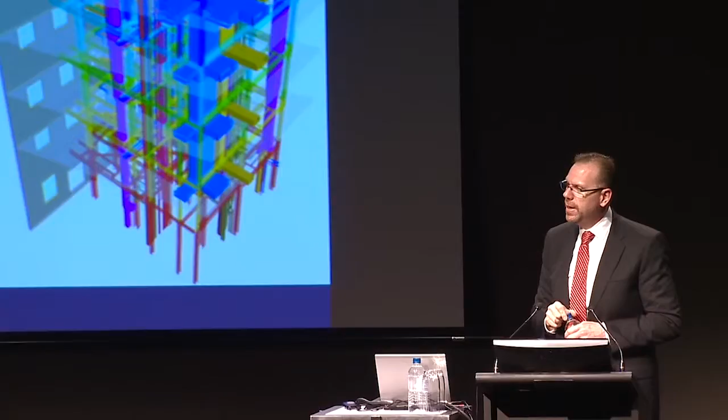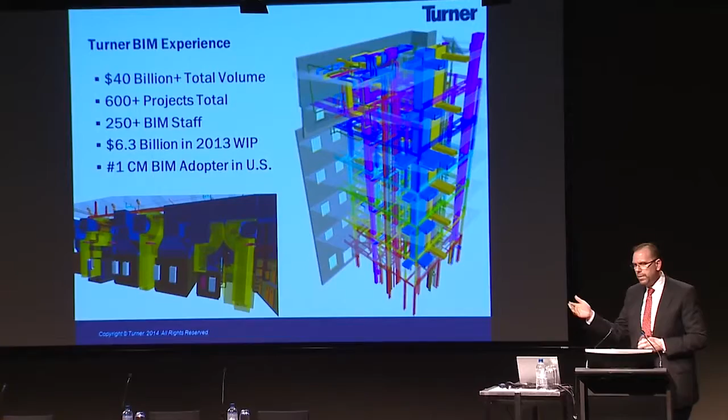Turner has been more by, I'd say, by accident than design, I hate to admit, a leader in the use of BIM. We started 6-7 years ago on the west coast of the U.S. with hospital projects in particular. It was a new technology. We saw the designers starting to model and said, well, how can we take advantage of it? As innovation typically happens, it was very grassroots, just people trying it out on projects. Then it was recognized probably about 5-6 years ago as really game-changing, or potentially having the potential for game-changing impact on the company. So I was, by coincidence, in between some assignments and was very interested in BIM, so I jumped in, started taking on some responsibilities in our New York office and then nationally.

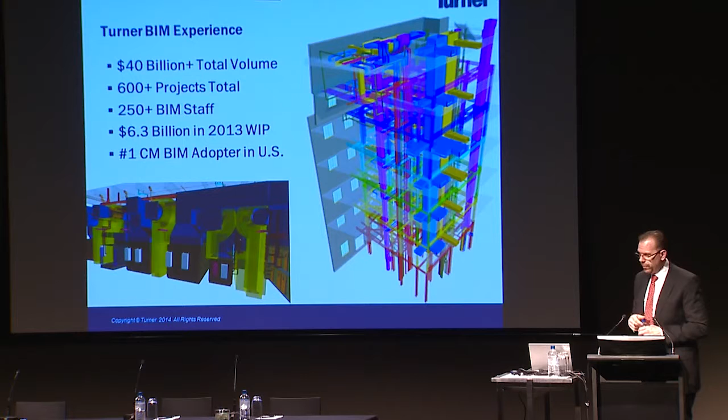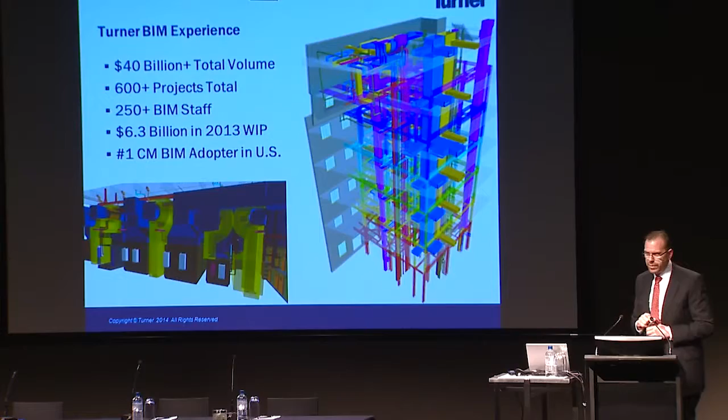In that time, we've had a tremendous amount of growth in the adoption of BIM. What's interesting, and I don't point this out to boast, but to highlight that our growth, up to over 600 projects now, or 40+ billion of work that's either completed or ongoing, was all happening without any sort of mandate. We've never mandated that you must use BIM. It was and continues to be very grassroots. If its value is proven, then people will use it, and that value has been proven time and again.

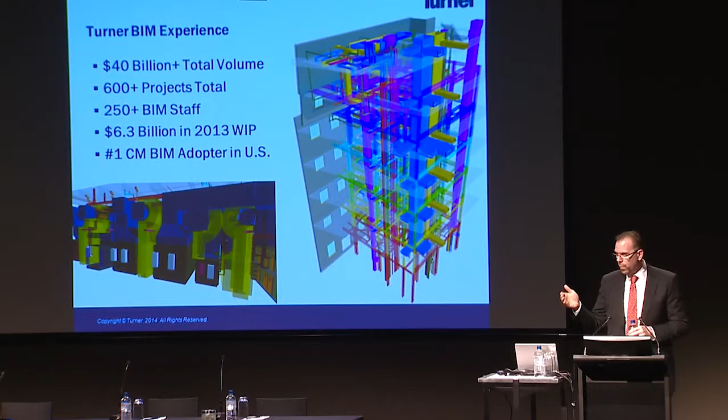But what's interesting is that where we are now, we're getting to that point where we've sort of saturated the basics, and now we're looking forward to how do we advance. So I want to talk quite a bit about that.

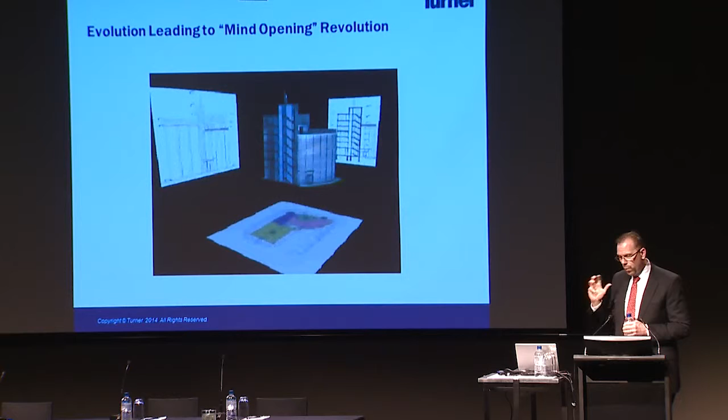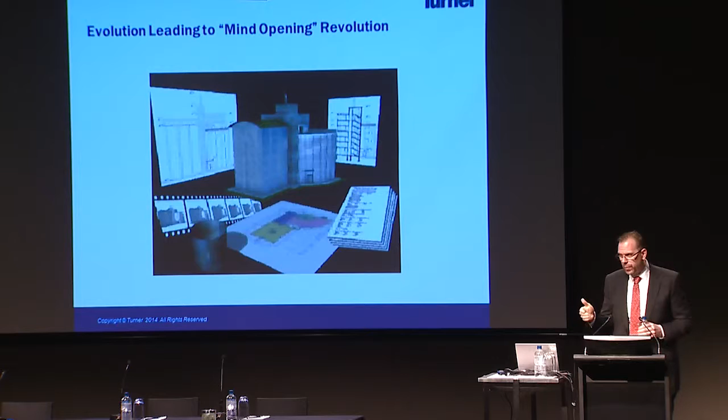That history is all well known to you, but for us it was an interesting thing, because I think BIM, for an industry that is very focused or locked into tradition and the same way of doing things for years and years, really sort of woke people up and said, wow, there are better ways. We can do things with new technologies and get better results. It really was an eye-opener and a door opener for a lot of people in the company.

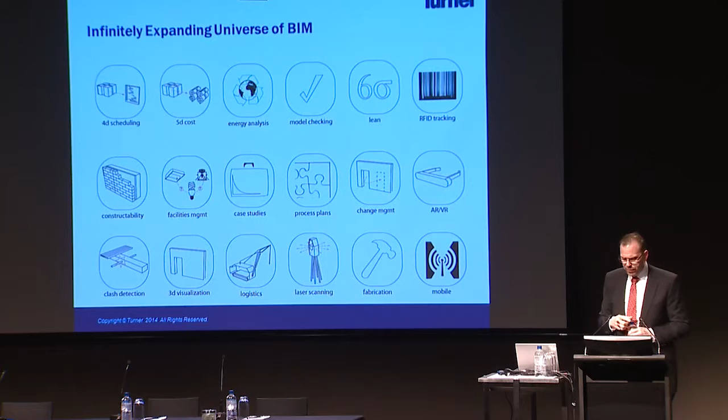And that's led to quite an interest in its broad application, as well as related technologies. It's almost this sort of tsunami of technology that's flooding us now, where everybody's sort of looking around saying, what other tools can we use? So what we see is clearly that there are, as everyone here knows, many uses for BIM.

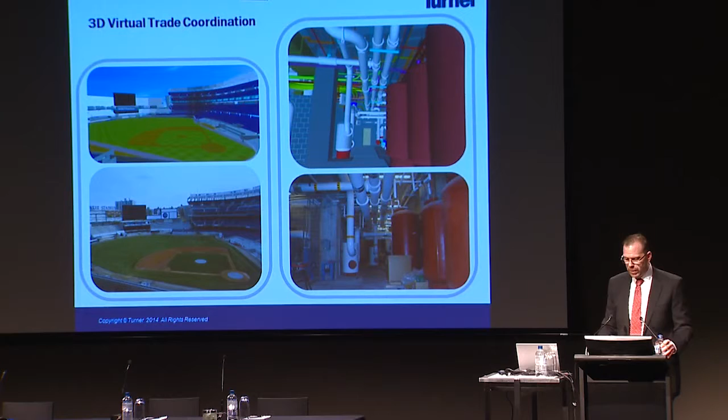I think we've hit most of the basic ones for our company, the trade coordination. This is actually an example - I went back a little bit in time - but this is one of the first big ones for us, probably 4 or 5 years ago, which was Yankee Stadium, the new Yankee Stadium. That was the first large project that we'd ever applied BIM for coordination in particular. It really changed the marketplace in New York City, because we were able to leverage a job of that size and that sort of signature nature of being $1.2 billion, to really change the marketplace. So that was a real start for us as a company, and then we continued to refine that and develop metrics and such around coordination.

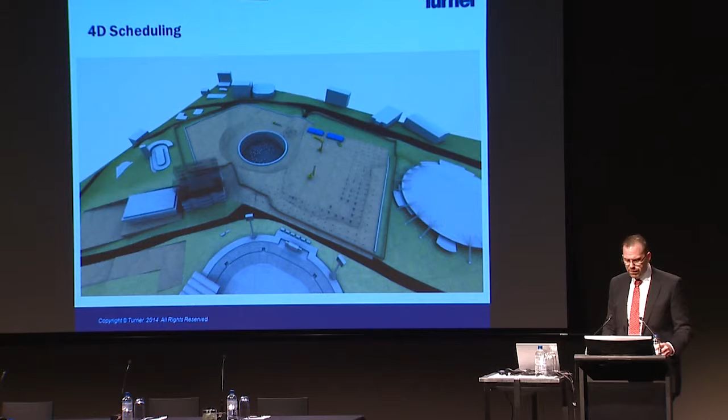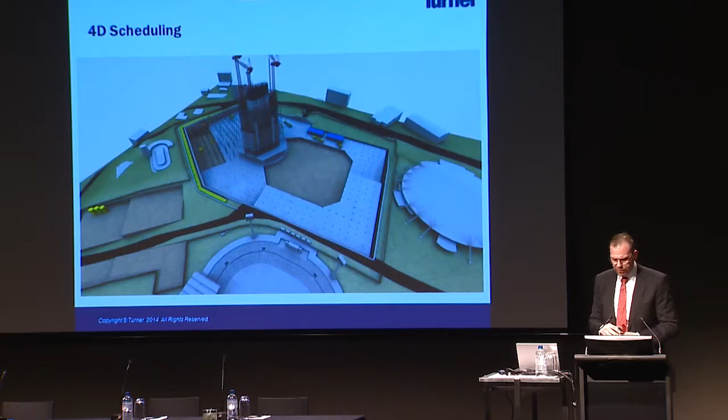Then it migrated naturally into scheduling, and this is an example of a recent one for a job in Kuala Lumpur. It's a 118-story tower where we modeled all the site work, all the logistics of the construction and the sequence as well. It was a fairly extensive effort because we actually got a model out of an architect in Australia, which was in ArchiCAD, so we struggled with that a little bit because that's not as common, but subsequently built this very detailed schedule. So that's fairly bread and butter - at least that's basic sequencing.

Same thing with logistics and safety planning. This example in New York City of one of our projects, the New York University Medical Center, the Langone development - I think it's running now about a $2 billion redevelopment on the east side of Manhattan. Very extensive, very difficult conditions, so everything's modeled to a high level of detail for logistics. And actually, we also worked with the City of New York on developing BIM-based submission plans for their site safety review.

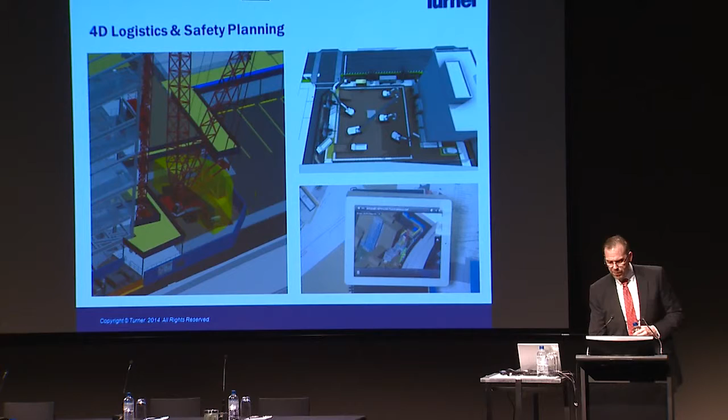Prior to this, they'd mostly been working in 2D, and in fact, one of the gentlemen who's going to talk tomorrow, Tyler Goss, was instrumental in that effort, working with the City of New York and the Department of Buildings, and coming up with this BIM-based plan. So it was a pretty intensive effort, but again, that logistics and safety planning is pretty standard.

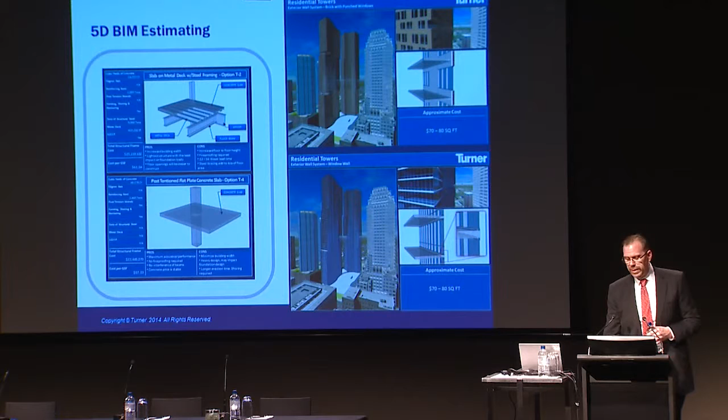Estimating we've started branching out over the years. Now starting to tackle, okay, how do you really integrate BIM into the estimating process? And we've had sort of fits and starts. I have a fairly high standard for BIM for estimating, which is that it's truly integrated as part of the process, that the estimators are using the model, they're extracting the quantities in an organized way. We haven't fully integrated this yet into the estimating process. It's a bit of a struggle.

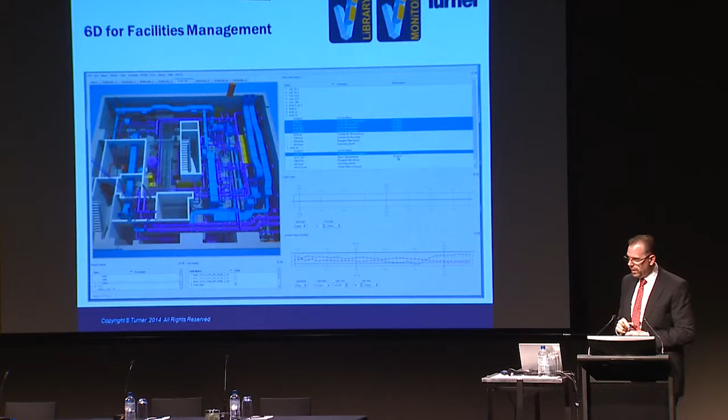And then the other push, so we went upstream, now we're going downstream, is also working on a solution for facilities management. This is an example of a software that we actually worked with a third party in guiding the development. So it's taking the model and it's linking all the documentation to the model, but also we sort of achieved what I call the holy grail of BIM, which is linking into the sensor data.

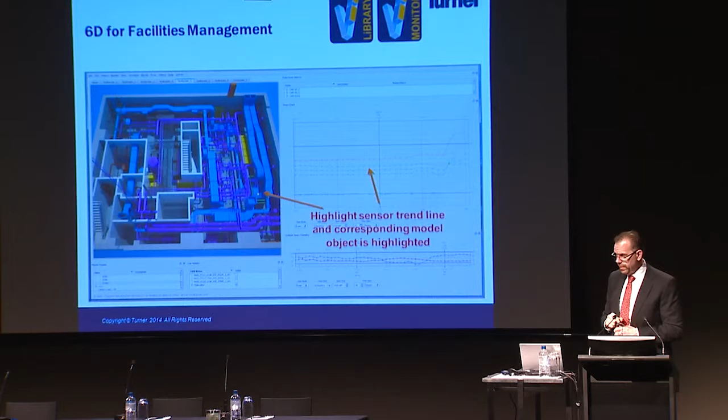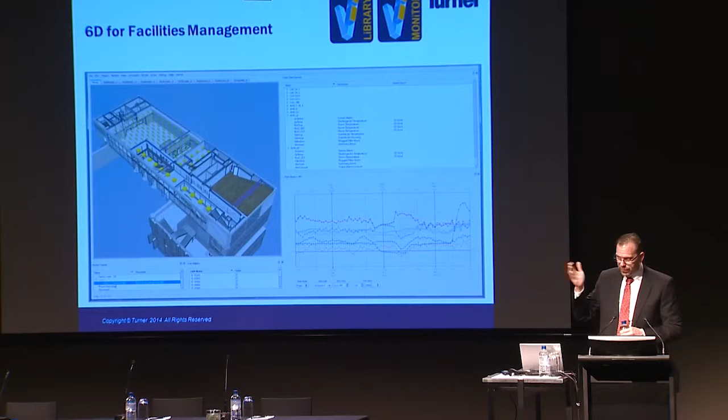So we got a server and connected into the actual control system through a BACnet protocol, and we're streaming all the sensor data out and linked into the model. So you can click on an object and see whatever the temperature, humidity of that piece of equipment or the room or what have you. So it's a pretty amazing, pretty advanced solution.

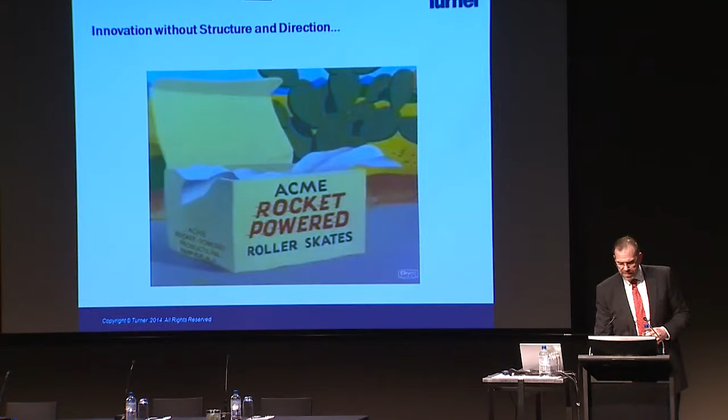But what's interesting is there's a lot of things you can do, but the challenge is guiding it, providing direction. Otherwise, you risk this effect of being out of control. You're innovating for innovation's sake, or you're changing for change's sake, but to what end? And it actually can be quite dangerous if you start running around saying, "Oh, look at all the things I can do with BIM." It can cause trouble.

So, what I wanted to talk about today was this sort of framework, and it's purely my perspective on this, based on having lived through this growth of BIM, and also I'm responsible for lean implementation and IPD, project alliancing type agreements. And what's become clear is there's multiple elements to successfully capitalizing and leveraging these innovations like BIM, which are really focusing on people, the process, and the purpose why you're doing this.

The key, I think, when you're talking about people, is to realize you have all those uses of BIM, 3D, 4D, 5D, which are nouns, right? They're things, versus using BIM as a verb, for action, to do something to get a result, to try to get to a goal that you're trying to accomplish. It's an action tool, and otherwise you risk this issue of what they call the law of the instrument, that if you got a hammer, everything looks like a nail.

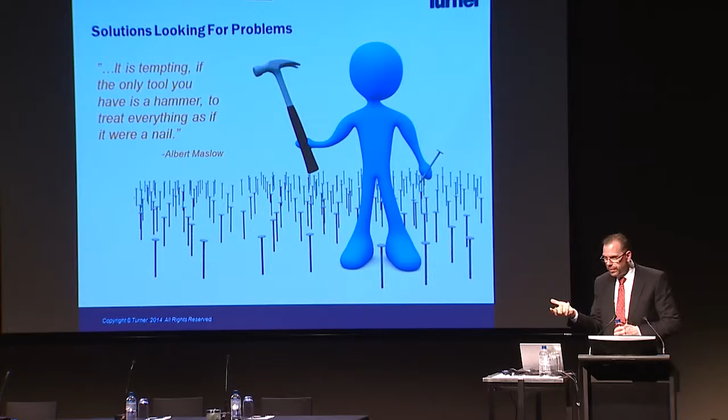I notice that a lot with BIM. We get trapped in this idea. Well, we got this solution, and it's looking for a problem. Let's go try to apply it to something. Versus the other way around. Flip it around. What's the problem? What are we trying to solve? What are the struggles that everybody's dealing with every day? What are the pain points? What are the things we want to improve? How do we help people get their job done better?

And you go back to that example of facilities management. It's a classic. That solution I showed you, we deployed it at, I'm debating whether I should tell you the name, a large educational institution in Manhattan. We actually delivered that solution. They installed it on 10 different machines for the facilities managers, and that was about a year and a half ago. I think since then we maybe had one person look at it.

The facilities guys, we said, oh, well, it's their fault, right? It's them. It's not us. It's a beautiful solution. It's got all the information in the model. It's all linked. It's got all the sensor data. Who wouldn't want that? It's beautiful. But you think about that guy who gets up every day.

The facilities guy gets up in the morning. He goes to work. He's got two things to do. He's either fixing something or he's maintaining something. And so when he goes out and changes that filter, how does that help him do that better? It doesn't. And he's keeping track of maintenance information, probably doing it on an Excel spreadsheet.

I mean, our CIO once told me this, and I've never forgotten it because it's so true. Every solution always competes with Excel. It's true. Anything, because that's the easiest, quickest tool, and that's what people tend to use, and they default to that. So when we're looking at these solutions, when we're thinking, this seems logical, why wouldn't they want this? You've got to flip it around and start thinking from that people perspective.

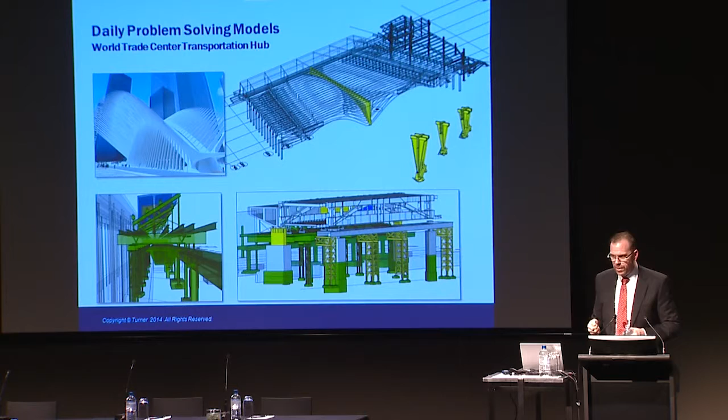We were doing hundreds of little models every day. A superintendent would come over and say, I don't understand. What am I doing over here tomorrow or today? Where's that crane going to go? How do I connect, and how am I coordinating with the work that's adjacent? They had to figure these things out every single day. The fastest, quickest, easiest tool we could use was SketchUp, and it was tremendously helpful and useful.

And we had at least two people full-time down there through last year, and then it started tapering off a little bit.

Here's another example of a very targeted use, fairly recent. We have this large project, the Wilshire Grand Hotel in Los Angeles, and they have a huge mat slab, so they wanted to use this as an opportunity to beat the Guinness Book of World Records for the largest mat slab pour. And so they did something very interesting: they modeled everything they could imagine that was going to go into that job.

They first laser scanned the hole, then they modeled the rebar. There's a cooling system to keep the concrete temperature down, all the little steel starter columns, even the shoring—everything was modeled. Then they placed the concrete, and they deducted for all those things that were modeled, so that they could get an accurate volume of the actual concrete. What's interesting is I'll try to do the math in cubic meters, but the target—

I'll give it in cubic yards. The target, the Guinness Book of World Records previous record, was 21,000 cubic yards of concrete. We modeled everything and came up with a quantity we'd need of 21,240 cubic yards, and the actual concrete poured was 21,200. So we had a difference between what was modeled and estimated, 21,240 versus 21,200—a difference of 0.2% from the actual to the estimate. Unbelievably accurate.

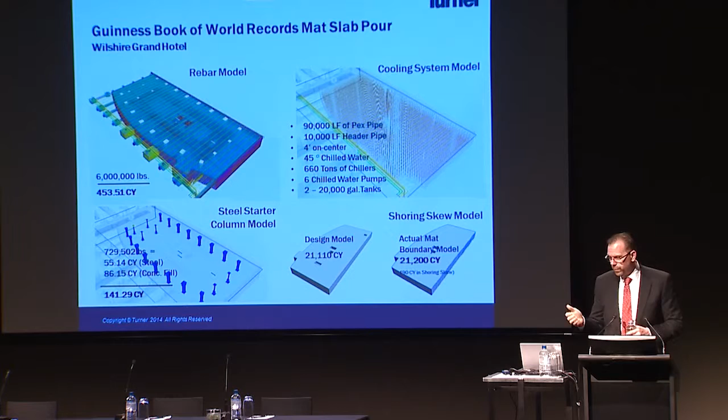And though it was for a purpose you wouldn't expect—this recognition in the Guinness Book of World Records—what you also start to see is, given that accuracy, how do you capitalize on this for a business purpose? It starts to get our people thinking more about trusting in the product.

Here's another example of simple things we're doing to make it easier and solve simple problems. Estimators doing 5D estimating could take quantities off a Revit model all day long, but I don't hold that as our standard. Our standard is integrating it with the estimating process, so average estimators are using the tools and taking advantage of models.

So the simplest on-ramp is something like SketchUp. We built a little in-house plugin for SketchUp where you can use material properties and then use that to organize all your quantities. Very basic—you'd say, oh, it's sort of childish. There are much more sophisticated solutions out there, and we know that. We've used pretty much all of them. We own them all, unfortunately.

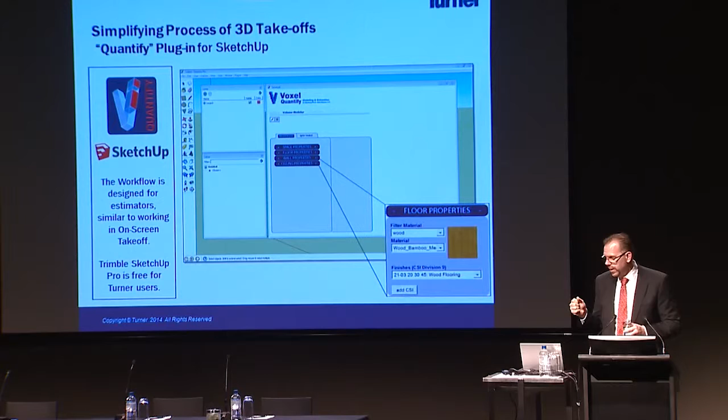But at the end of the day, you've got to think about that 50-year-old senior estimator who's been doing it his whole life the same way, hand takeoffs. If you give him the Ferrari of BIM estimating, he'll never get out of the driveway, so why even try? So we give him something simple: hey, how about SketchUp, and you get some basic quantities for your massing. It's easy, it's approachable, it's not anxiety-inducing—they don't have to figure out all this new software.

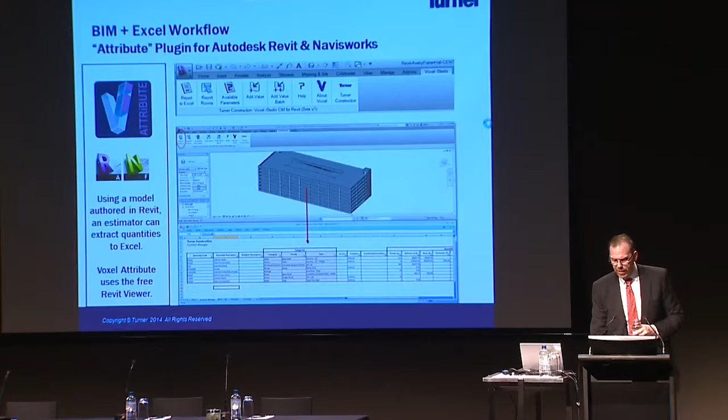It's basic. Same thing when you escalate that a bit—another plugin we developed in-house just gets your quantities out bi-directionally and back into Revit or Navisworks via Excel. Again, why fight the Excel bias? Use it, take advantage of it. Let them work in Excel, but then go back and forth with the quantities and organize them in a way they can use. Oh, there's the Wilshire, out of sequence.

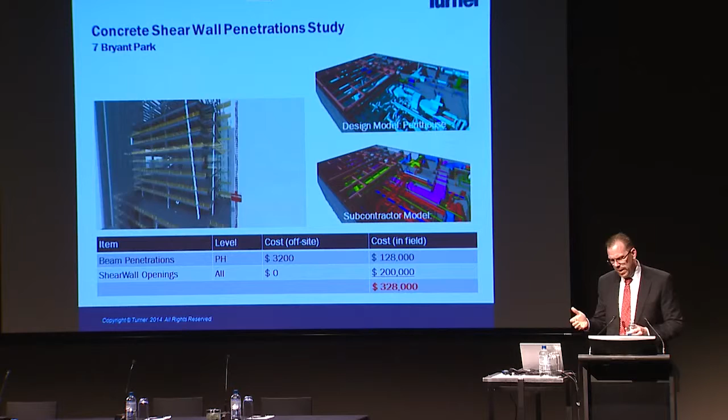Here's another example of using BIM for a very specific purpose: an office tower in New York, 7 Bryant Park. This one was specifically around a thick concrete core going up through the building. They had a lot of penetrations, and when we got the design models, I hate to say it, but they weren't fully coordinated with the shear wall, so we ended up going back in, making sure all the penetrations were coordinated.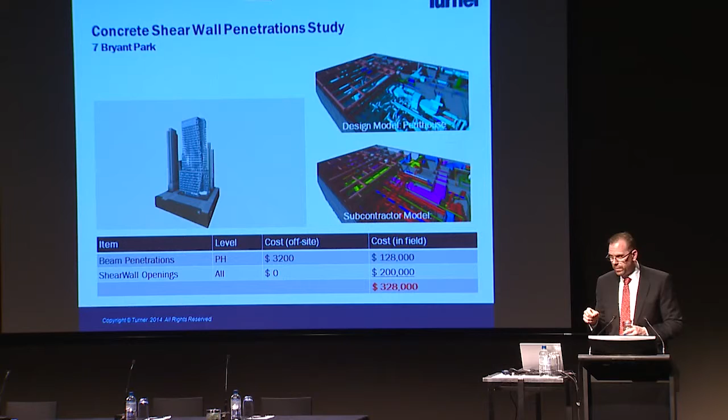We found a lot of issues that we wouldn't have otherwise caught if not for BIM. There's a projected savings, just cost avoidance at the first pass, of $328,000, but that's only for a limited area of the building. We subsequently went through the rest of the building and found more issues, so it's probably $500,000 to $600,000 just in that special study coordinating the shear wall penetrations.

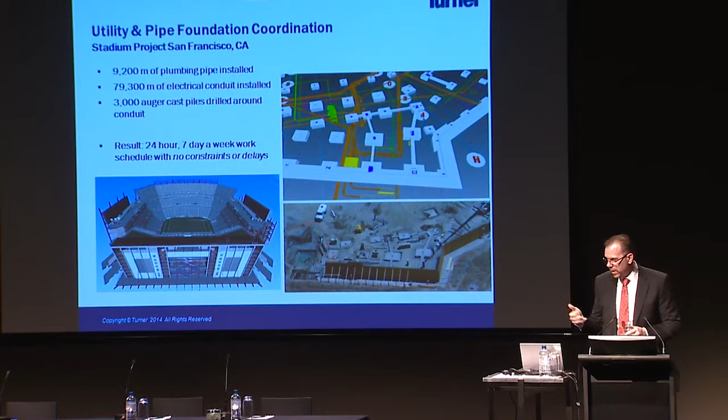Another example is a big stadium project in San Francisco, where we coordinated utilities with foundations: 9,200 meters of plumbing pipe and 79,300 meters of electrical conduit, coordinated with 3,000 piles being drilled. It was a very specialized use of BIM, because that was a problem the project manager and superintendents were grappling with. It's not just the coordination but the sequence as well, since all this utility work was weaving in and out of the piles.

Another example of specialized use is using software called Solibri, where we built an effort on behalf of an architect in California. We took their model and ran it through a code checking exercise using Solibri, converting the building code, what they call OSHPD code, into rules, and then running them through the model so you could see where things are out of compliance.

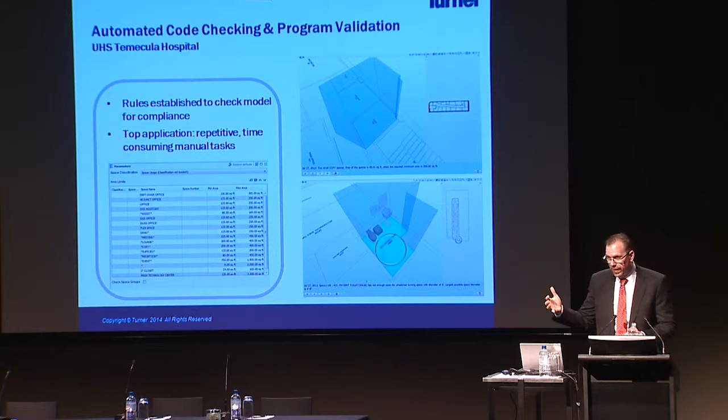So the image at the bottom is the turn radius of a wheelchair in a bathroom. There's a certain radius you have to have. We had a model with all the fixtures in the space, and we run a rule to check if a wheelchair can turn in that space. If it can't, we have to redesign that bathroom. So we flagged all those places in the model that were out of compliance.

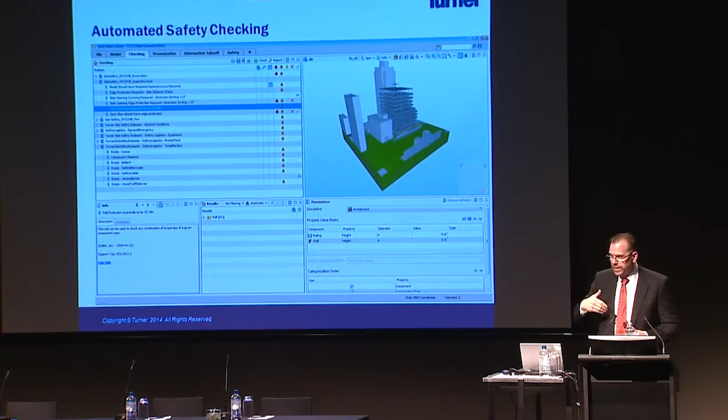It was interesting because we did that on behalf of the architect. Normally this isn't a place we'd play because it's more on the design side, but it was a need. The requirements in California are very stringent. When you submit, if it's not right, it gets rejected and you have to start the process all over again, so we wanted to get it right the first time.

So we extended that effort next to try to take a lot of our safety rules and automate those as well. If you've got a model, the safety managers have all this knowledge in their head about what they're looking at when they're walking a job. In reality, what's in their head can be converted into a rule: if this condition, then this. It's simple conditional statements. So you set up a rule and run it through Solibri again, and it kicks out results.

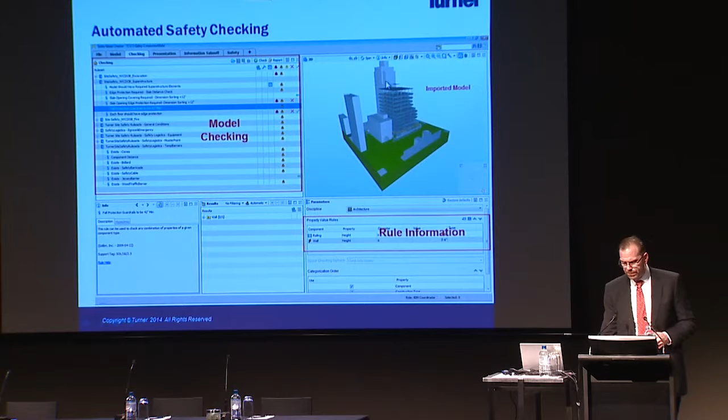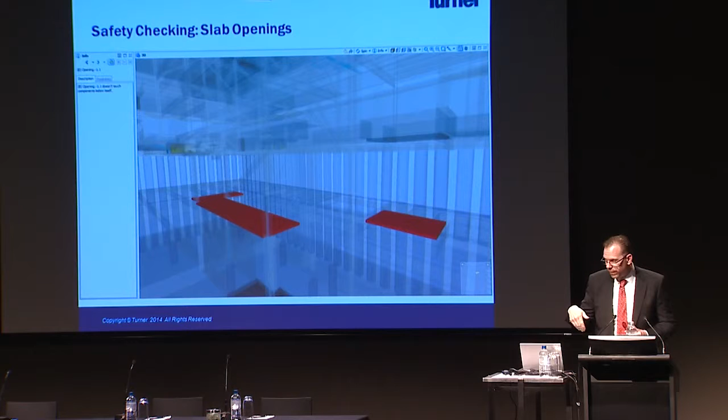For instance, this is an example where it's highlighting the slab opening, so you've got a perimeter protection issue. We're flagging ahead of time to the safety people as well as our staff: look, these areas you're going to have to plan for. You have to buy the protection from the trades or provide it ourselves. And it's just an automated process.

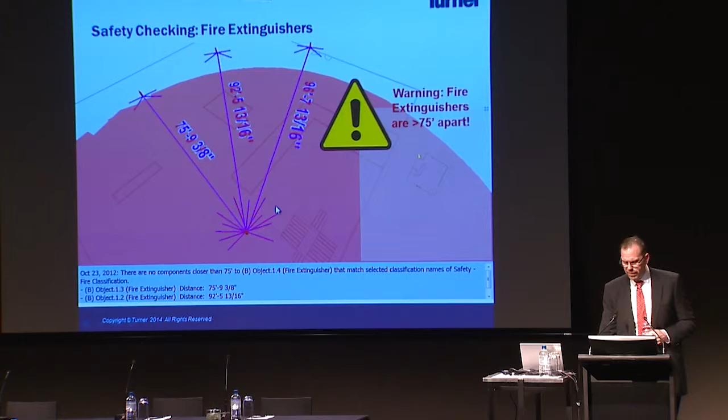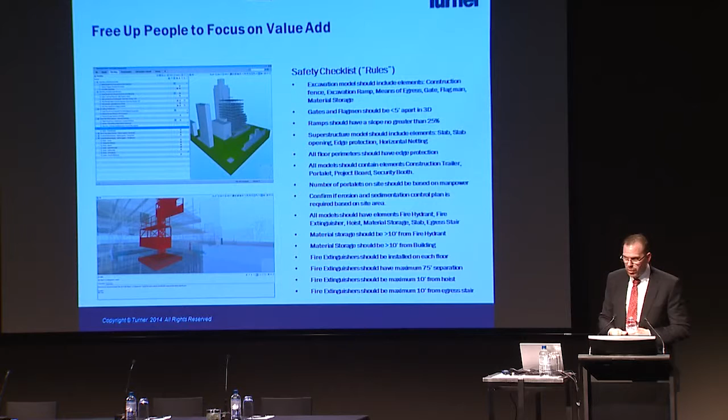This one's checking distances of fire extinguishers, because New York City in particular has some strict requirements. Again, the idea is how do we leverage BIM. None of that fits into a nice, neat category like 4D or 5D. It's more about using it to help people do their jobs better, free people up from tasks that aren't real value-add, so they can focus on delivering greater value to our clients and to our own staff.

So it's a very conscious effort on our part to look at BIM in a very different way. What's interesting, though, with all that being said, it sounds so simple: well, we just help you, we go around and say, hey, we're going to help you do your job better. Well, it still doesn't mean we don't get stiff-armed quite a bit, because it's an interesting thing that people are -- if it weren't for people, everything would be so easy.

So I'm going to do an exercise. Who has pen and paper? How many people have pen and paper? A few? Good, okay, so for the ones that do, and even the ones that don't, you can still follow along and try to imagine it. I want you to write the words Turner Construction Company, just write it in 2 seconds, and when you're done writing it, I want you to tell me. Raise your hand, whoever's got the pen and paper, everybody write it out and then raise your hand. I want to take an average count of how long it takes you to do that.

You're already done? Well, that's fast. Okay, so I didn't even time you, I need my watch. So, 5, 6 seconds. Flip your paper over so you're not looking at it again. And when I tell you to go, do it again, then raise your hand. Hold on, everybody flip your paper over so you can't see what you wrote.

So write it again: Turner Construction Company. Okay, 7, 8 seconds, something like that. Okay, flip your paper over.

So the next element I want to talk about is creating a process to make and sustain change. Because all things being equal, habit kicks in. People want to do things the same way. How do you keep advancing? How do you improve and innovate over time?

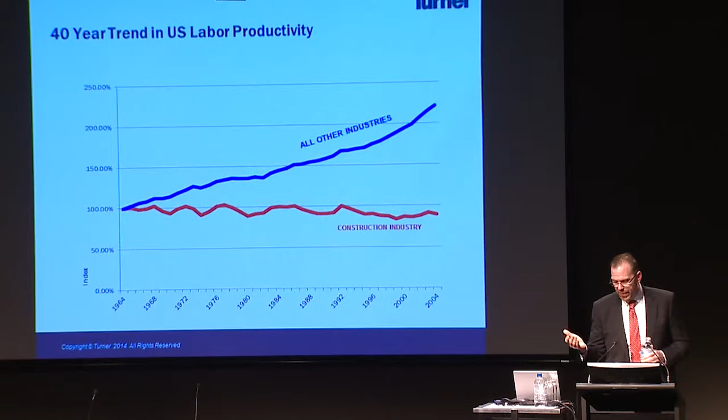I'm sure you've probably seen this embarrassing slide that we often show in the U.S. - I'm sure it's nothing like this in Australia. It's that productivity trends in construction, that red line that's flat lined for 40 years. We've not increased our productivity. All other industries are on that blue line, almost doubled productivity. So it's an embarrassing thing, but it's interesting. We see that a lot, and there's a lot of reasons you could attribute to that flat line.

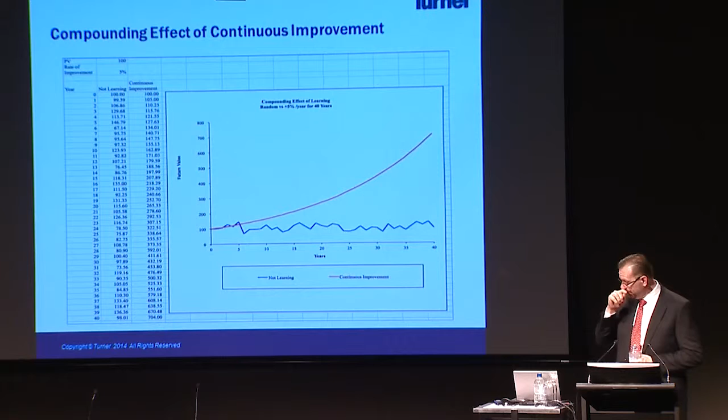Here's my take on it. Actually, when I think about it, I was on a plane again when I did this - I get my best work done on planes. This is a little Excel spreadsheet and a chart I created once, because I had this theory.

I said, well, what if that flat line is really a function of this failure to learn - failure to establish those baselines, improve upon them, and build on them, so that compounding effect of continuous improvement. What you see on the left-hand side is the year 0 to 40. The first column is not learning - it's sort of a random thing, with the baseline being 100. One year we improve 1%, but then the next year we go back 2%, next year is 5% plus, then next year is -3. I just bounce around.

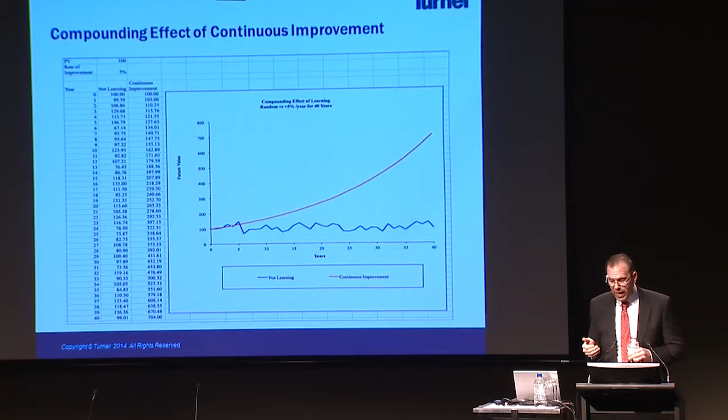The column next to that is, well, what if it's like putting $1 in the bank? The next year it's $1.10, and then interest on top of that becomes $1.15, interest on top of that becomes $1.25 - the key being, every year I don't take the money out of the bank, I keep it there, I lock it in. That becomes the new baseline, and I build on that, I build on that, I build on that. Well, that's the red line - it's the compounding effect. If I can establish that every year, lock in the improvement and then build on that, you get this dramatic increase. By the end of year 40, it's a 700% increase from the base year.

So to me, there's a root cause here - our inability, or lack of a process for improving, for establishing the simple cause and effect. I often joke that it feels sometimes like we operate as an industry like it's Victorian era medicine, with leeches and vapors and stuff. We do things and we don't really know what made things better, so we just keep doing all of it, hoping that somewhere in there's something that did make things better.

What we're trying to get to more, and I see the need for it more and more, is a much more scientific approach. It's like my third grade son was learning this, right - the scientific method. You have a hypothesis, you test your hypothesis, you check your results.

If the results don't match, you go back and you adjust your hypothesis and you start that process over. In the lean world, it's called PDCA or PDSA: plan, do, study, adjust, or act. But really, it's simple: it's looking for the cause and effect. I do this, did I get a better result? If I didn't, then I go back and I check and I adjust what I thought.

And BIM, and just generally technology and innovation, is very difficult to discern its impact if you don't have a very systematic, methodical way of applying it. And we try to do that as much as we can in-house, and we don't do it nearly as much as I'd like, where we're trying those different tools, we're applying them in very specific ways, saying, okay, what do we think we're going to see when we use BIM for this purpose? Did we see that result? So we can start to say, yeah, you know what, that's good. Let's make that the standard, then let's move forward.

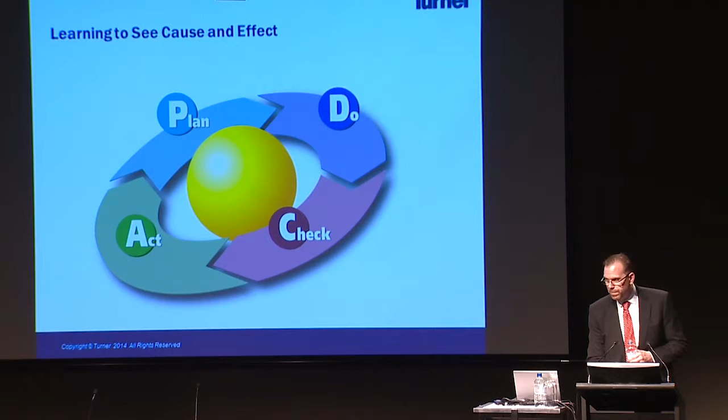And so what we're trying to get to is, again, this PDCA cycle, this continuous improvement, where you make something better, you prove that it's better, you lock it in, that becomes the standard, that wedge on the graphic, and then you innovate to find new ways to improve that. So you're never done. You just keep trying to get better and better. And my mantra is better before perfect. It's a derivation of don't let the perfect be the enemy of good enough.

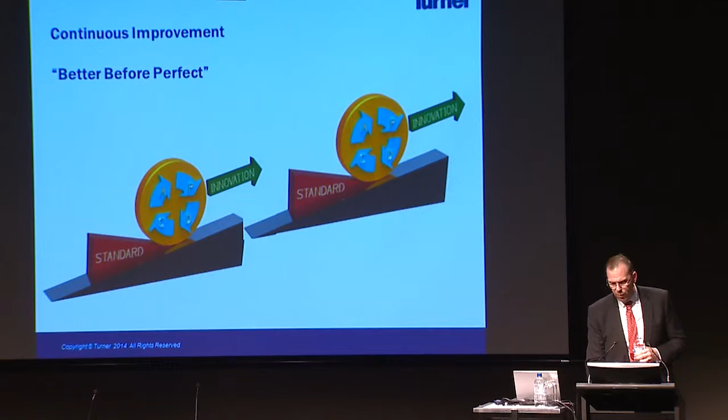It's too easy, especially I've noticed with technology in particular, because we get so wrapped up in technology, always looking for that silver bullet, that panacea, that perfect thing that's going to be right around the corner. Let's just wait. It never comes. It's not about the technology. It's about the people. It's about the process. You make those better, and then you find the solution that supports that. And so you also have to have this methodical way of approaching it, so that every year you're getting a little bit better, and you know that you're getting better.

So I'll click through, because again, process is not an easy one to show. So I will show more results, and this is almost a bit of a chronological order. Some of the early BIM jobs, with BIM and some aspects of continuous improvement being applied to the project as well, and the results that we got. So this job is the Nintendo headquarters, 4 or 5 years ago, I think, that we completed it. Really maxed out on BIM.

You can see there's a crane optimization study, a lot of prefab, a lot of modular, lots of just-in-time deliveries, that sort of thing. We accelerated the schedule 3 months, dramatically less labor on site, because a lot was being pushed off-site. Productivity was dramatically higher, and 7% of a $200 million budget was returned to the owner as savings. I mean, really quite dramatic.

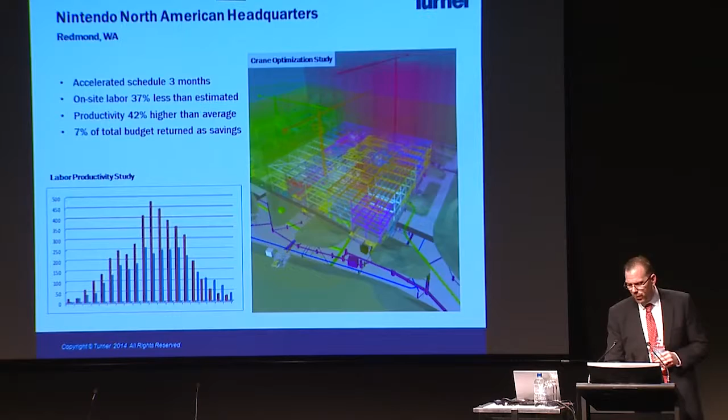I remember this was the eye-opener job for me when I visited. I'm like, wow. And you can start to see that recipe. All of a sudden, it's not random, oh, we're doing a bunch of these things. It's like, okay, you do these things, you get results. And then what was interesting to watch as I saw other jobs coming online is that same sort of recipe, not just BIM, but BIM in this continuous improvement framework, this process of improvement, and then great results.

Again, Middle Tennessee Medical Center, probably 3-4 years ago, the GMP, the guaranteed maximum price, was significantly below the owner's budget. We returned $4 million in savings. Again, on-site labor savings, ahead of schedule. One of the first times we started seeing electrical prefab; that was always one of those trades where I wondered, how do they take advantage of it? But you can see in this case, they were doing a lot of prefab of their conduit and junction boxes off-site, palletizing them, shipping them. They saved 42% on labor.

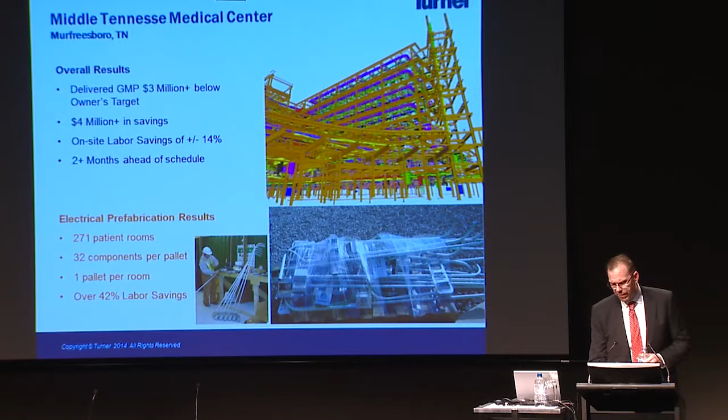The first example I'd seen at that time of the trades working on top of the deck, using total stations, taking the points off their model, laying out the hangers ahead of time from on top of the deck, drilling down and then dropping them, then pouring the deck.

Much safer, much more productive. With BIM, you have this accuracy, and then you have the labor savings that's the result. So you could clearly see BIM enabling a better process, a better and safer way of doing the job, and getting better results.

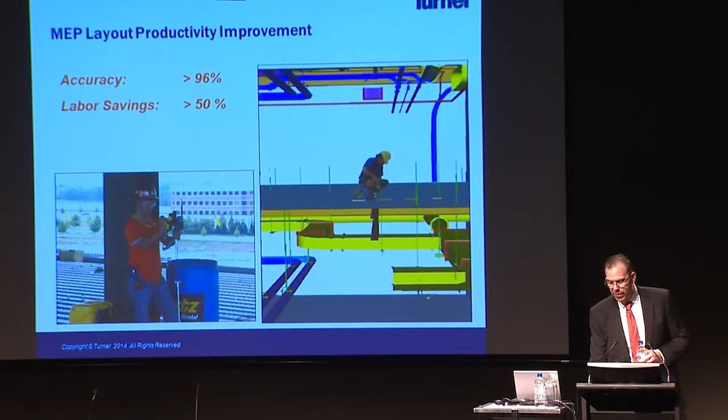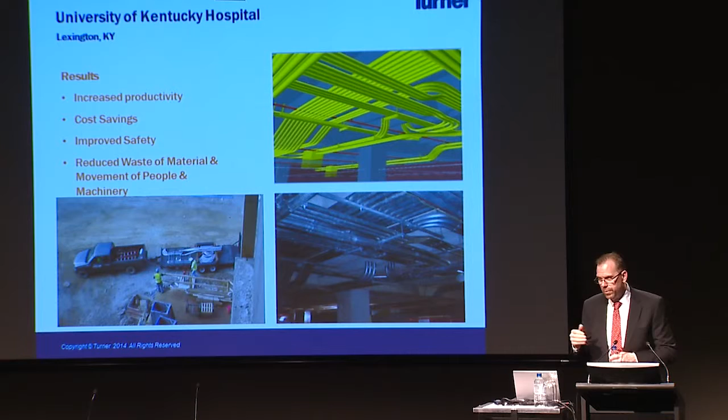Another University of Kentucky example. This was interesting because, from an electrician standpoint, in the picture on the lower left, this electrician had about a $25 million electrical package on a $250 million project. He never had a conduit bender on site the whole time. Every piece of conduit was bent off-site in their shop and shipped in, never larger than would fit in the trailer of his pickup truck. Everything was delivered to the site from the back of that little pickup truck. It was all about small batches, flow, just-in-time delivery, getting only the materials we need when we need them.

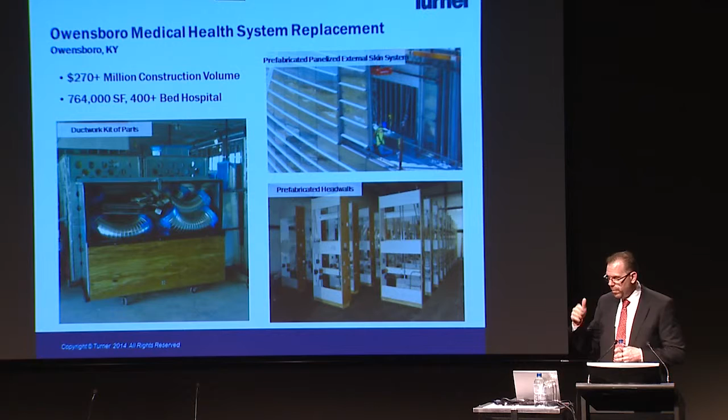Owensboro, a few years ago, was another example of maximizing the enabling technology of BIM for improving how people do things. Prefabricated head walls and panelized exterior walls aren't unusual, but the mechanical contractor took a kit-of-parts approach, bagging all his ductwork and putting it into a container that got shipped to the site, with everything on wheels just rolled onto the job.

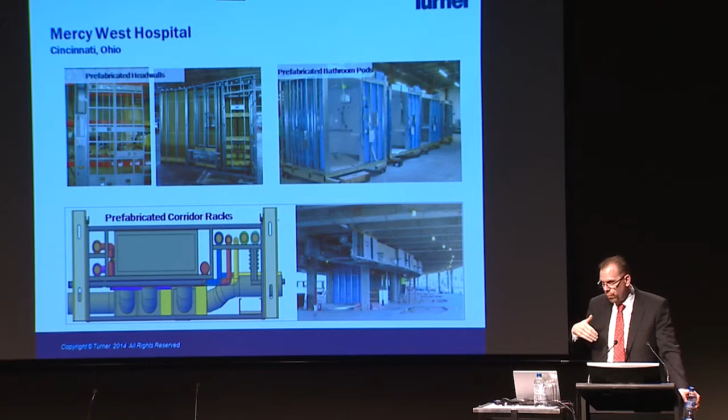Another example from about the same time. I wanted to highlight this one because beyond the head walls and bathroom pods - everybody gets excited about bathroom pods, I don't know why - the more revolutionary aspect of this job was the prefabricated corridor racks, these modular racks. We had all the trades - mechanical, electrical, plumbing, fire protection to an extent - working together off-site in a warehouse, a factory-like environment, building multi-trade racks on a unistrut system. It was one of the first times we'd done that on a project.

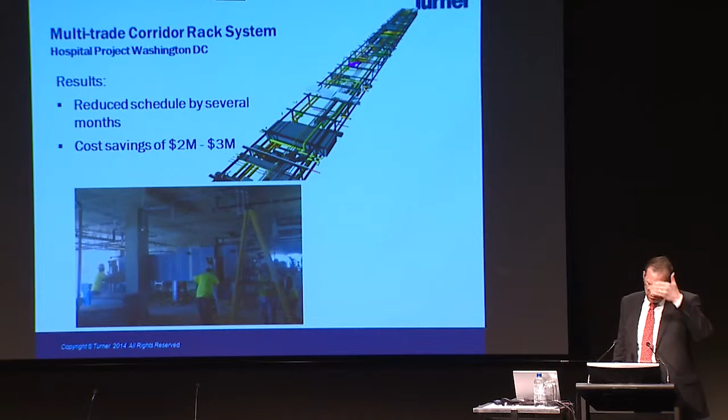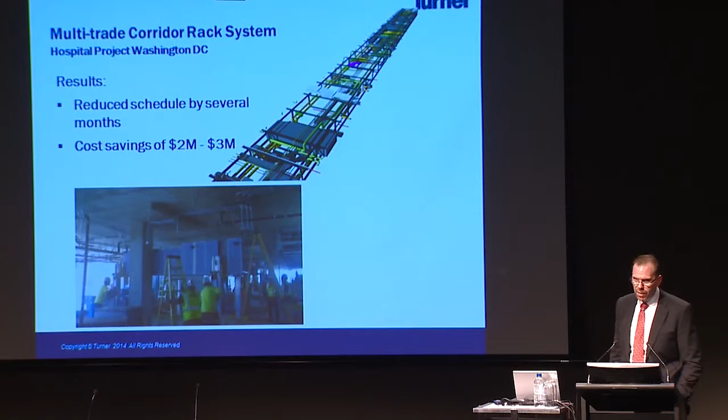What was interesting was that some team members from that project went on to this job happening right now, down at Sibley Hospital in Washington - I guess I shouldn't have named them. The team from Ohio who had done this rack system helped out our Washington office. This was a lump sum bid, an $80 million job.

We incorporated this scheme and pre-picked the subcontractors, the MEP subs. We came up with the idea to use this multi-trade rack system in the corridors - about 140 modules, roughly 20 feet long, across seven floors of the building, with about 20 sections per floor. They were all built off-site, so while we were doing excavation and foundations, they were building the MEP systems for the corridors. The minute the space was ready, they were ready to ship these racks in modular form.

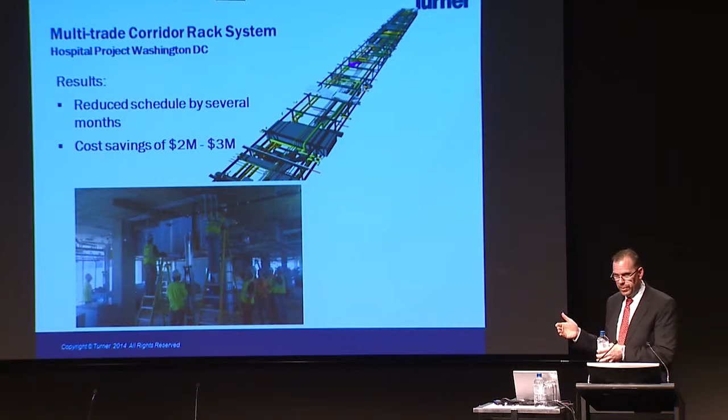The interesting thing was this was a lump sum bid - we planned for this and planned for the schedule savings, probably 2 or 3 months, plus a cost savings of $2 to $3 million that we assumed. We put that into our bid and won the job because of it. Now we're actually delivering it, thank God - it turns out to be possible, and it's going in right now. They're installing all of it.

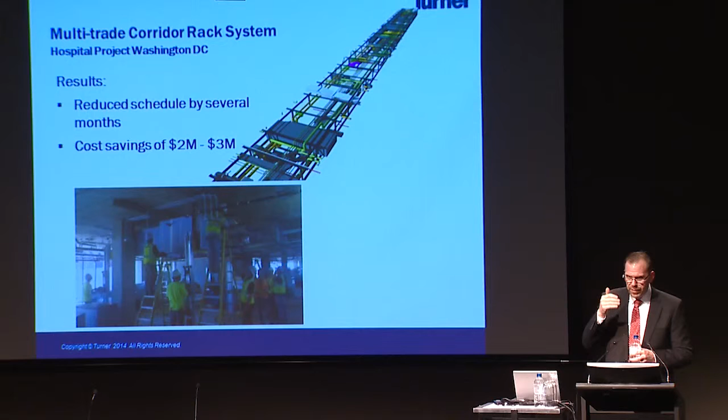So I mention that because this is a key turning point - it's now leveraging this for competitive advantage. We've addressed the people part, the process part...

Now we're saying, look, how does this apply both internally and externally to our clients? How do we win work with this? How do we sort of monetize it, if you will?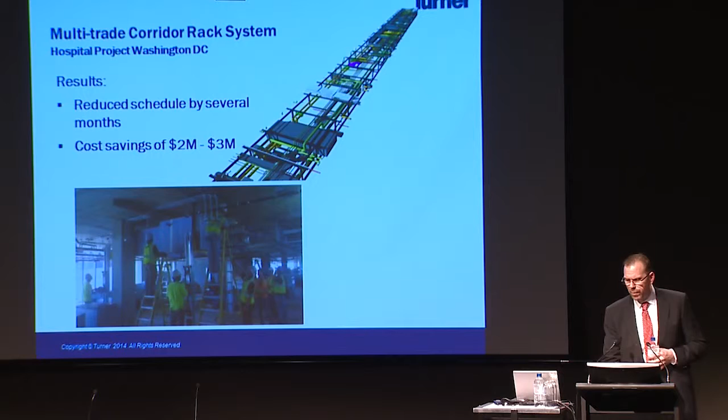So I want to end with this section on purpose. Why we're doing this, because again, I think that's critical. There's a direction, there's a vision behind this. It is trying to become a strategy. I want you to pay attention to this video, if you could, because I want to talk to you about this in a minute.

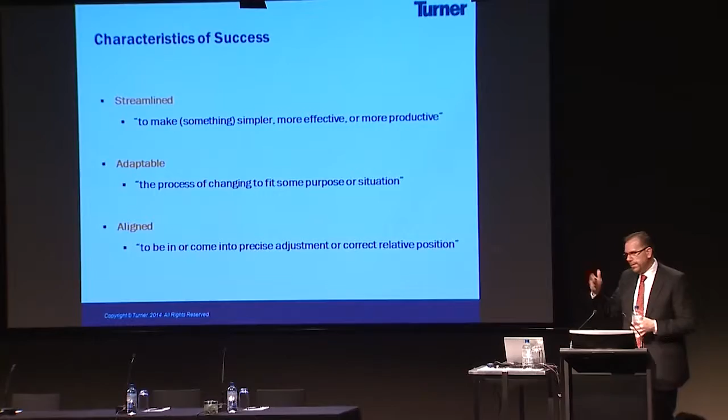There was a team of scientists who tagged cheetahs with GPS accelerometers, and I don't even want to ask how they got them on them, but they got them on them, and they tracked some cheetahs hunting. And what was fascinating was it wasn't the speed which made them successful. But even more interesting, cheetahs also decelerate faster than they accelerate. They slow down quickly.

They're also perfectly adapted in their paws. You maybe saw in the video that they're the only cat that actually extends its claws when it runs. And so what it allows it to do is grip the ground and turn. Same thing with its bone structure; it's evolved to be strong to take the impact of the deceleration and the turning. So the cheetah's success is its ability to pivot, its ability to change. It's perfectly adapted to that.

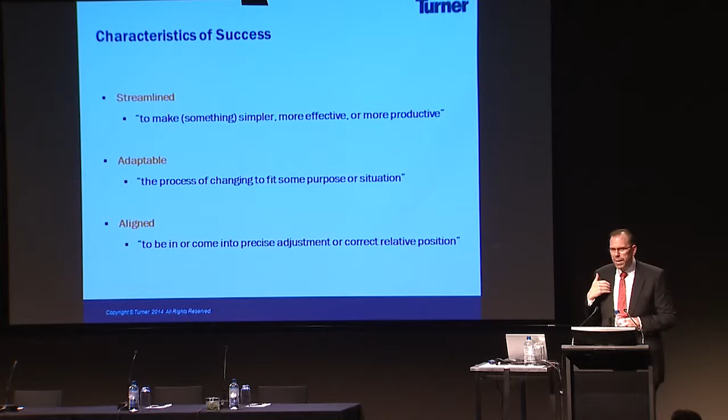And you notice when it's chasing that rabbit, right? It's always aligned with it. It's perfectly in alignment. It's always watching it, trying to keep track of it, and so it's got that sort of laser focus. And I use that as a metaphor for what we're trying to do. For us it's not about being fast or cheap. It's about staying close to our customers. That maximum agility to react to what a customer values and deliver that value in the most streamlined, effective way possible.

And I always use this quote from Peter Drucker, because I think it distills the essence of what a company is about. The purpose of your company is to create and keep customers. Everything thereafter is meant to get you there. So when I look at BIM, or also at Lean and other things, it's all in that context of how does this help me be more agile? How does it help me stay close to the client, deliver value, and be effective?

Sometimes I look at that video and I have this reaction, like I start to feel like I'm the rabbit, because some days, certainly when you're on a job site, you feel like you're being chased versus chasing. And so it's also a metaphor for what do you want to be? Do you want to be that forward-thinking, agile firm that is way out ahead of your competition and playing to win, or are you the rabbit that's just playing not to lose?

And if you want to win, then you have to start looking at the tools, the innovations, the process, the people as a framework for how you're going to achieve the results you're trying to get to, and what you identified. So again, I'll close with that reminder: this P3 type framework, right? The people, process, and purpose. When those are working, when they're in sync, there are amazing results you can achieve, and I think there are huge opportunities for any firm that's playing to win, that's out in front and willing to be a leader.